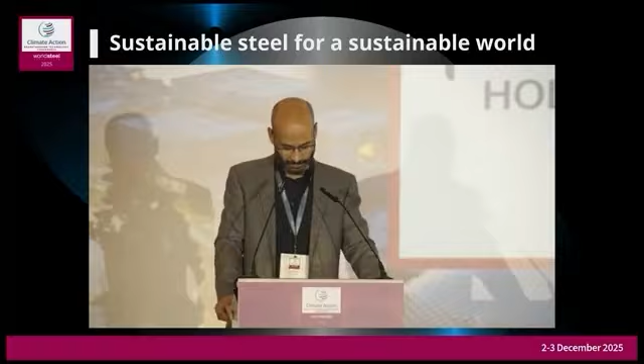It's a startup called Helios. It is going to be the Helios Cycle: decarbonized iron ore reduction through sodium looping. So done by Dr. Hani Farran, the VP R&D, Helios. Please.

Okay, so I'm Dr. Hani Farran. I hold a PhD in physical chemistry and over 17 years of industrial experience in energy and metal casting. At Helios, I'm the VP R&D, responsible for the development of the technology and also scaling it up. And I will present today a breakthrough reduction of iron ore by using sodium as the reductant.

The Helios cycle can address some of the challenges in the steel industry by using low-value raw material and processing it with sodium, scalable and practical, and even recycling it afterwards. It can be implemented at both ends of the value chain, in the ore mines and the steel plants. So let's dive in.

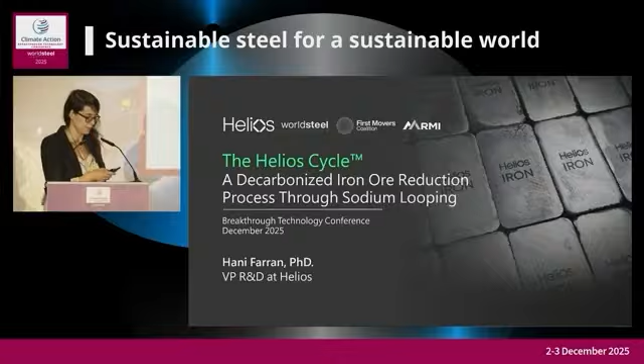Okay, so this is the cycle. We are starting with iron ore, and we are indifferent to the type of feedstock, as I will demonstrate in a minute. By using sodium, we are reducing the iron ore into metallized iron.

After several separation trains, we create two clean streams. One is the iron metal, and the other is the sodium oxide, which by using electrochemical methodology, we are reclaiming the sodium back into the system in a closed loop manner. So this is the cycle.

And why are we indifferent to the type of feedstock, meaning we can use low-grade iron ore and even waste products such as tailings and slag - we will talk about it in the next few slides. It's because sodium is thermodynamically selective to the reduction of iron oxide, meaning it reduces only the iron oxide and does not touch other compositions in the material.

So the energy consumption is 3 to 4 megawatt hours per ton, and the operational temperature is between 250 and 350 degrees Celsius. This is critical because we can implement it in the infrastructure of the industry without any significant or extreme retrofitting.

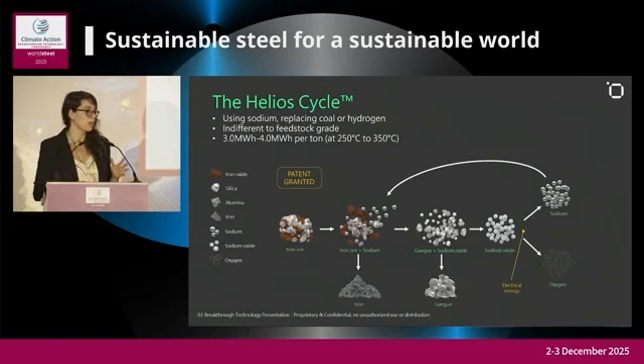So let's move on to the first example. We've conducted hundreds of experiments with different types of ores, and I will demonstrate three of them. One is a low-grade ore, unbeneficiated, with an Fe total amount of 37.3%. It contains hematite and magnetite, and you can see it in the XRD analysis, these are the compositions. In the table below, you can see the results after the reduction.

This is before the separation steps. I will explain later on what the separation steps are, but this is only the results of the reduction itself, meaning most of the iron oxide turned into metallic iron, and sodium oxide, of course, as a sequence after the reduction. Silica and nacrite, or sodium silicate, are the byproducts, and we can control that too - I will demonstrate it afterwards.

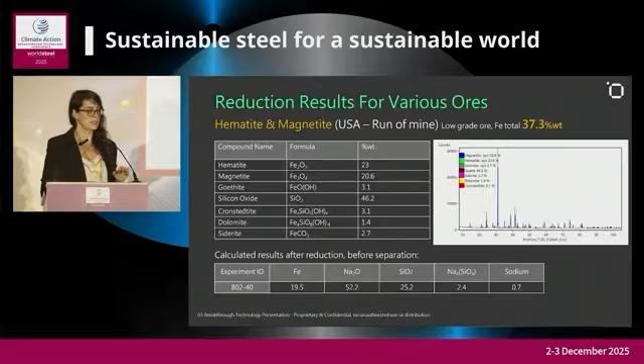It's important to us to understand exactly the metallization percentage of this process, so we calculated the fraction of metallic iron compared to the Fe total in the outcome. You can see here that because we have only metallic iron in the outcome, we are reaching almost 99% iron metallization, meaning we do not have other byproducts such as ferrite, and we only reduce the iron oxide to iron metal.

So this is a really challenging material, unbeneficiated ore, and yet we managed to achieve with high efficiency the high metallization. Now we will go to the next example, which is tailings.

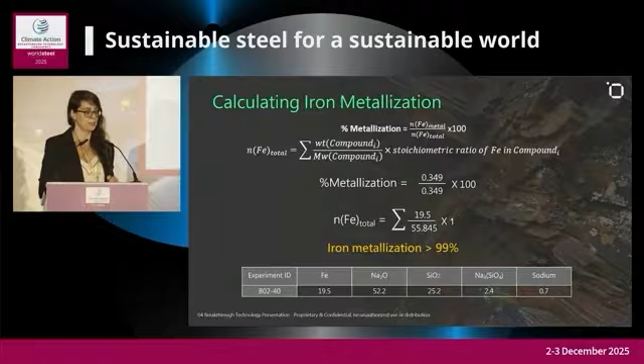We use tailings, which is a low-grade iron ore, only 41%, but together with it, it's a material with a high level of impurities. Because XRD doesn't share the entire story, we evaluated the elemental analysis via XRF and evaluated the phosphorus and sulfur impurities in the raw material.

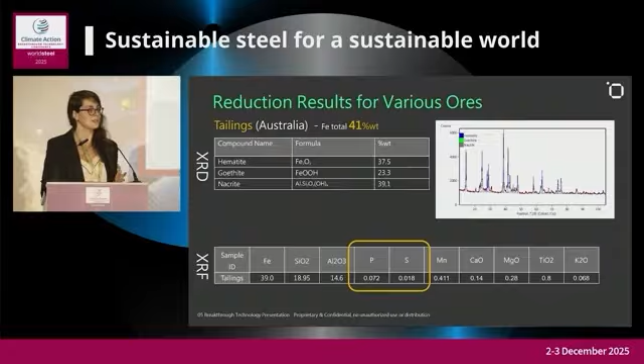So this is the material we are starting off with, and we wanted to understand exactly what the Helios cycle, or the reduction with sodium, produces as an outcome.

This following slide demonstrates that again, we reached almost 99% metallization because almost all of the iron oxide turned into metallic iron. By ICP, we evaluated the impurity levels in the outcome material itself, and we found that the level of impurities dropped dramatically. This is really significant because we started with low-value material and turned it into high-quality iron with low impurities. This is crucial to the industry and to understanding exactly what the next step is.

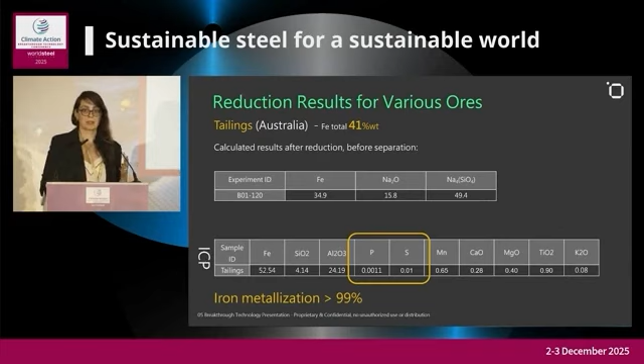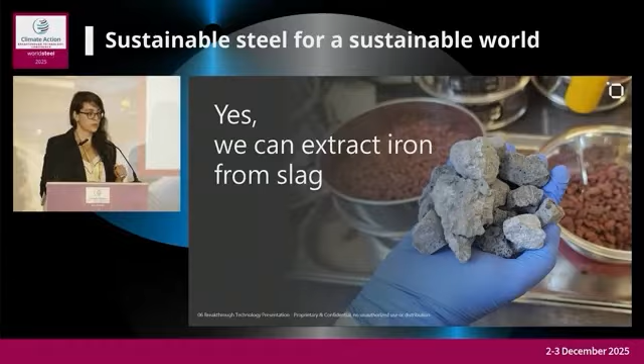So the third example is something we wanted to understand if our technology can handle: slag. We took EAF slag and wanted to understand if we can extract the iron from it and reach, again, a low level of impurities.

Again, 96.9%. The Fe total in the raw material is only 22.8. And it's really a challenging material to deal with due to the calcium silicate inside and the other compositions.

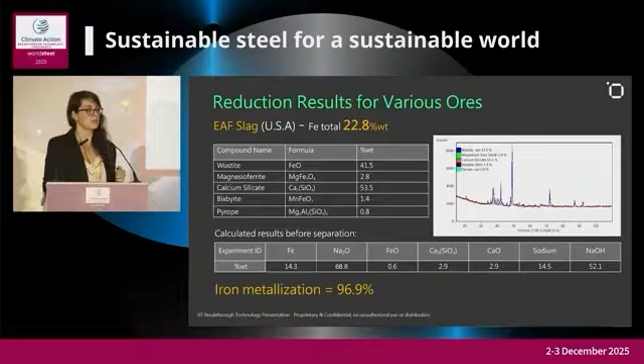So we've demonstrated 3 examples, low grade and also waste material, and conducted the metallization, the reduction, in high efficiency.

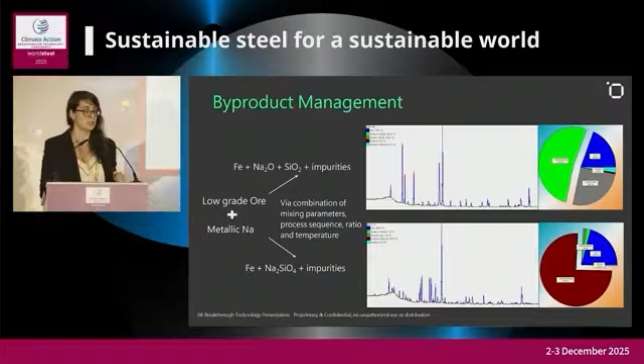Meaning we can control in the process if we want to reach silica at the end, or sodium silicate in the end. And why is it important? It is important because by controlling this outcome, we can control the separation methodologies that we want to use.

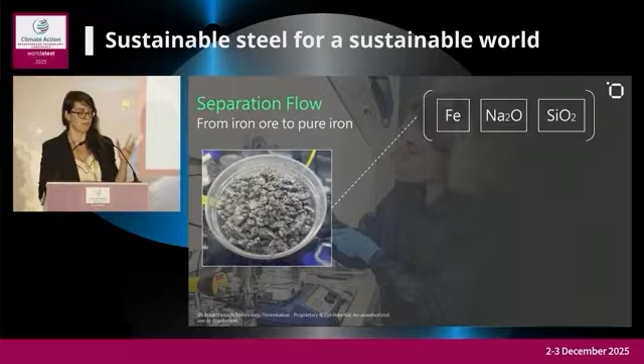So the separation flow is, again, we are starting with the reduction results. For example, here the Fe metal, sodium oxide after the reduction, and the silica as the gangue. The other impurities, in most cases, we found out have an affinity bond to the sodium metal. And therefore, in most cases, these are the outcomes after the reduction: Fe metal, sodium oxide, and silica.

So the first stage is, by magnetic separation, to separate the silica from the Fe metal and the sodium oxide. The Fe metal, in most cases, will be attached to the sodium oxide because of the nature of the reduction. And after the magnetic separation, we've conducted a chemical separation in order to create two clean streams: one is the Fe metal, and the other is the sodium oxide.

And it is important to us because we want to reach high purity of metallic iron, and the sodium oxide, which is essential to reclaim back in the electrochemical dissociation. So this is the separation flow.

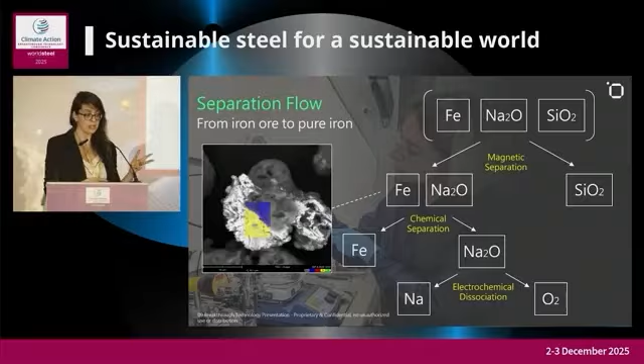And now sodium. Sodium is the reagent, and of course it's essential, both because of economics and sustainability, to reclaim it back and keep it in a closed loop manner.

You can see here the system that we are using, and it's designed in order to evaluate, or to reach, maximum recovery of the sodium. And you can see the small animation of the sodium metal creation from the sodium oxide.

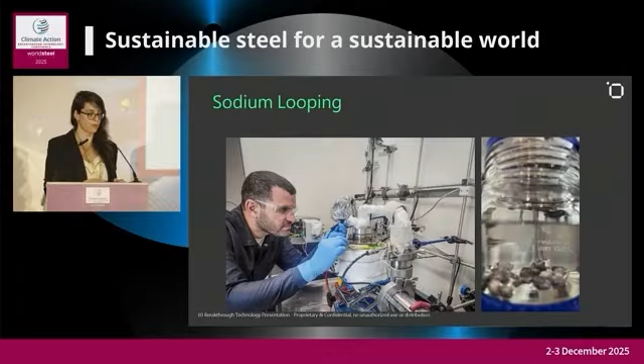So again, after separating the Fe metal from the sodium oxide via chemical separation, we use the reclamation by electrochemical unit, or electrochemical methodology. So this is just diving in a little bit about the electrochemical cell that we are using.

On the cathode side, of course, there is the evolution of the sodium metal. And on the anode side, by using sodium oxide as the reagent - which is the one that the sodium is reclaimed from - there is only oxygen evolution, meaning we are using so-called dry conditions and not hydrogen evolution.

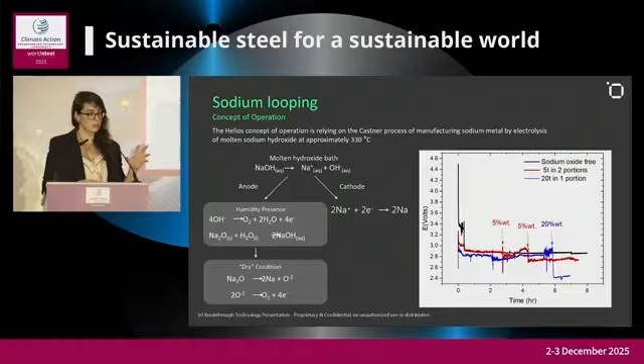You can see in the figure on the right that by adding the sodium oxide, which is from the separation train, we are lowering the potential. And by lowering the potential, it means, in other words, that we are at the level of voltage of the oxygen evolution. So this is the sodium looping.

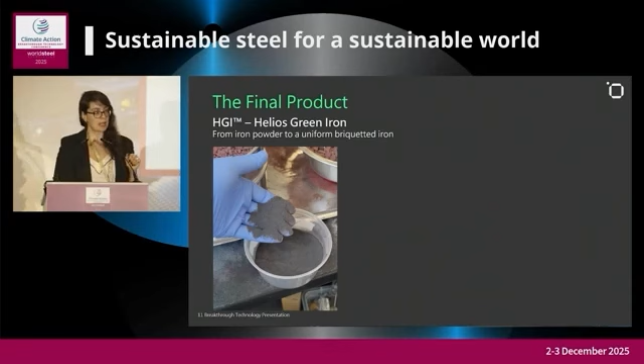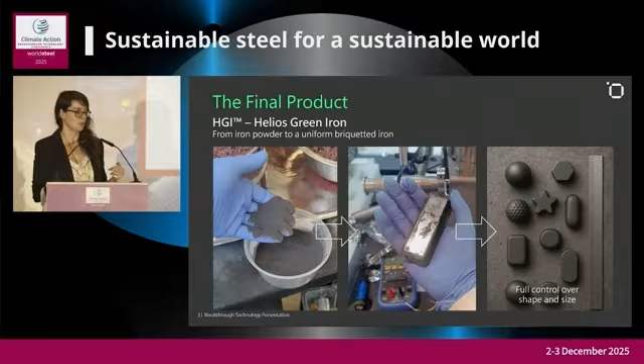The final product in the Helios cycle is in a powder form. And in order to briquette it, and because it is in a powder form, we can be flexible with the briquetted outcome. We can use different shape, size, density, because we are starting with an iron powder.

So I've talked a little bit about the starting feedstock, which in most cases we are using, or we want to show the advantage on low-value material, low-value raw material. And by using the Helios cycle, we are reaching high quality of metallic iron and manage to reclaim back the reagents in a closed manner.

So before we move forward and I show you our broader vision, it's important to me to emphasize that this process and this technology is inherently scalable.

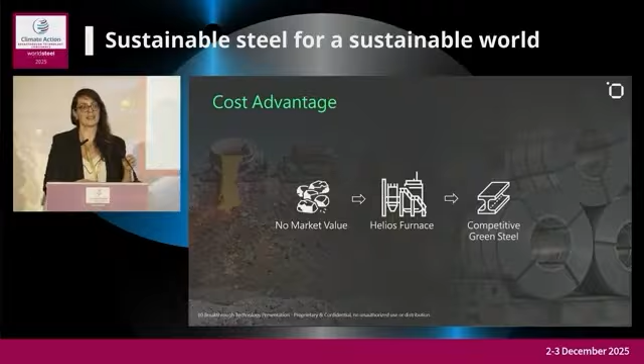And why is that? It's because we are using a known methodology, a known and existing engineering methodology in the process. For example, for the reduction, we are using a stir tank reactor, and for the separation steps, we are using, for the low-scale, a Nutsche filter and afterwards a Funda filter and a continuous chemical separation. So it is a known and existing methodology.

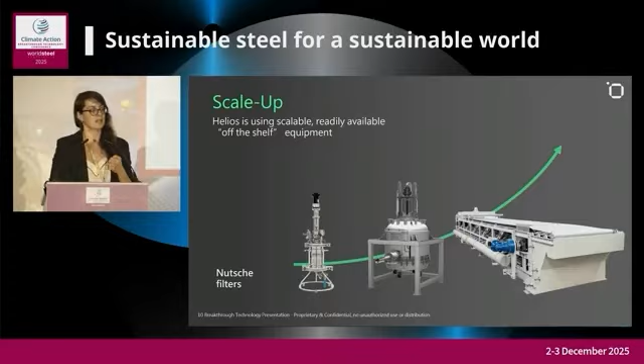Of course, we need to accommodate it to our process, to the parameters of our process, but the essence are known in the industry already.

Our current stage is a mini pilot producing hundreds of kilograms per month, and our next goal is the pilot scale of tons per day, and afterwards a first-of-a-kind demonstrator with a capacity of 50,000 tons per year.

The initial stage is doing it in batch mode, but parallel to that we are also evaluating continuous processing, and the leap from batch to continuous will be relatively low risk due to the kinetics and thermodynamics of the reaction.

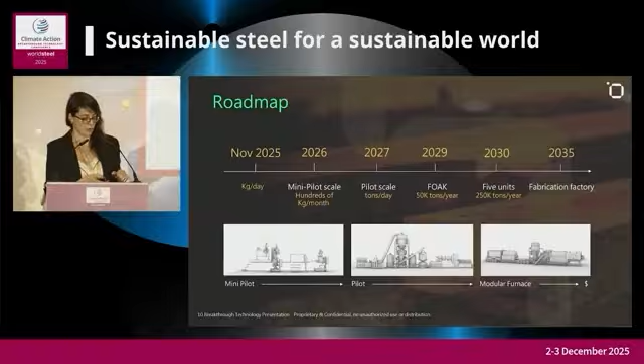So let's move forward to our vision. A key point is that the kinetics of the reaction is extremely fast, and because of that, our goal is not to scale up in building-size furnaces, but modular, semi-trailer size units the size of 40-foot containers.

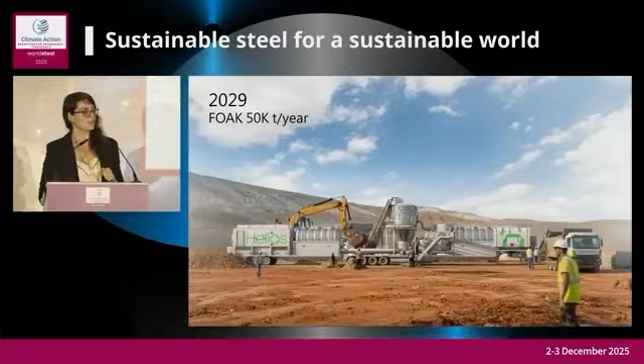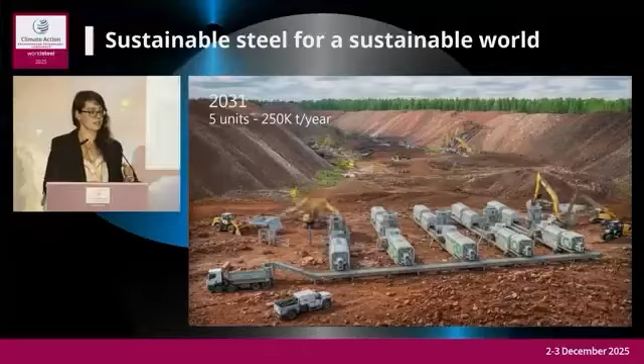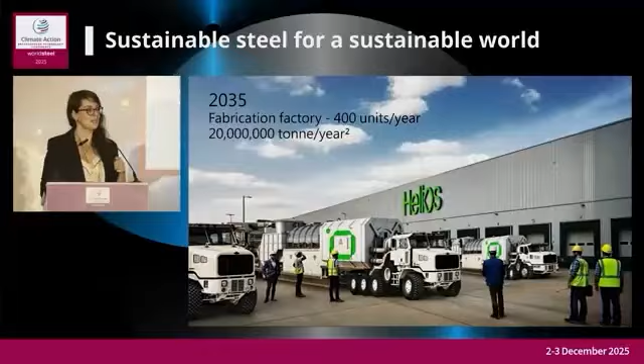And we can stack those units, each at 50,000 tons per year, into a large area to increase capacity. It can be implemented either at the mine side or close to the steel plant. Ten years from now, the goal is to have an assembly facility that manufactures those units and increases capacity even further.

To summarize, we use low-value feedstock, ranging from low-grade material like hematite, magnetite, goethite, and even wustite, to waste products such as tailings and slag. From those materials we convert to high-quality iron metal with a scalable and practical process, and we can change how we think about and approach raw material in the industry.

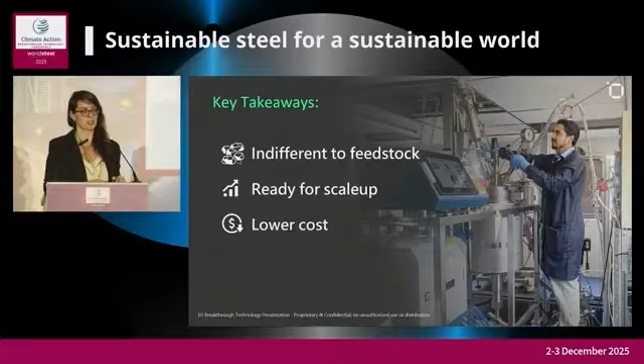Questions? Thank you, Dr. Hanni, for your nice presentation.

I have one question: have you done any energy balance? Suppose you have mill scale, which is high FeO content, more than 90%, versus slag which is 20 to 30% FeO, iron oxide. How is the impact on energy during your process?

Yes, 95% of the energy is from the electrochemical process, from the sodium reclamation process. According to the mass balance, we use metallization as the first part and then the separation step. Currently we have a loss of only 20%, but that's because we are only at the beginning of scaling up.

We didn't optimize yet the operational process of the separation.

No, based on your thermodynamic calculations—either you reduce a high oxide material or a low oxide material—what is your energy balance?

So actually, because most of the energy is due to the sodium oxide, it doesn't really matter, because it's the outcome of the reduction step—meaning the amount of energy will go together with the amount of sodium oxide that we need to reclaim back.